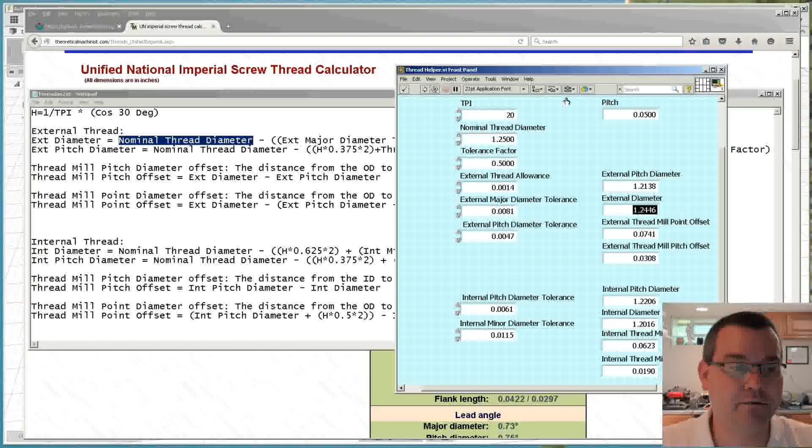Then I take the same tolerance factor concept and I add it to my minor diameter. So this will give me the internal diameter to make in my model. So if we go back to my calculator here, I've got a minor diameter tolerance of 11.5 thou. I'm going to apply half of that to my diameter, and I get 1.2016 inches.

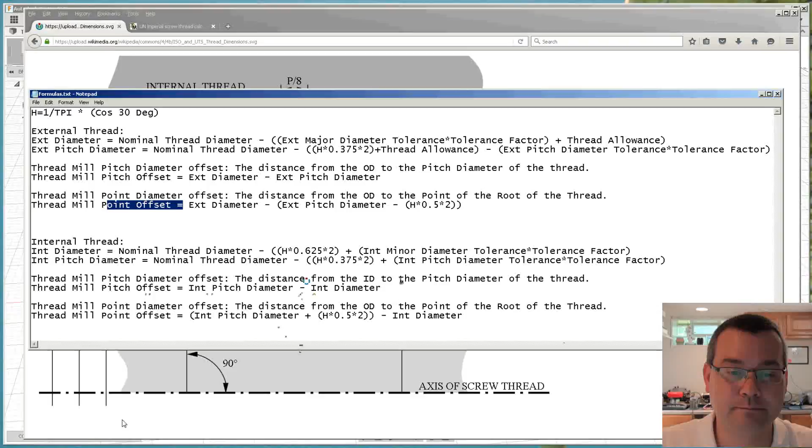So let's look at my little calculator here again. We typed in all of our tolerances from our thread calculator, and here's our pitch diameter tolerance. We're going to use half of it for this example, and then we're going to spit out those two numbers: if you're using the point method, this will be your diameter offset number, and if you're using the pitch diameter method, this will be your diameter offset number.

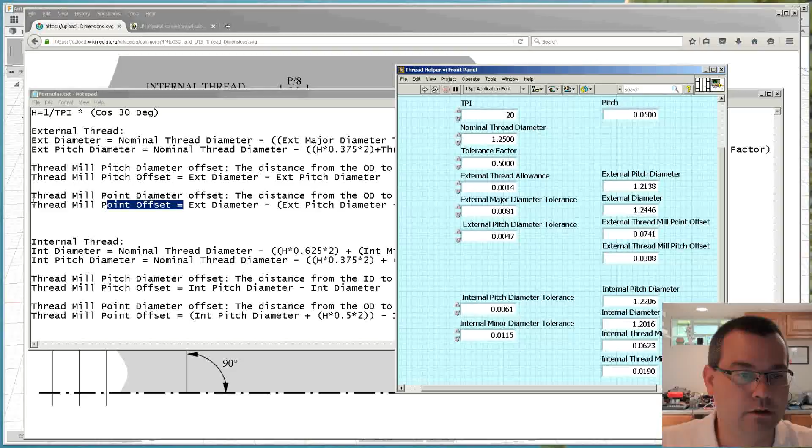So let's apply this and set up a toolpath in Fusion 360. First I need to define a mill, and for thread milling, Fusion 360 currently does not have a thread mill mill type, so they just have you use a flat mill, and we have to describe the diameter of the flat mill. Now I'm using the point diameter, so this thread mill is actually a little tiny bit smaller in diameter because thread mills have radius points on them, they don't have a very sharp point, there's a little bit of radius associated with them. But that is the diameter if it came to a sharp point. My flute length is simply just the height of the cutter, and that's about it. That's all you really need to specify for the tool.

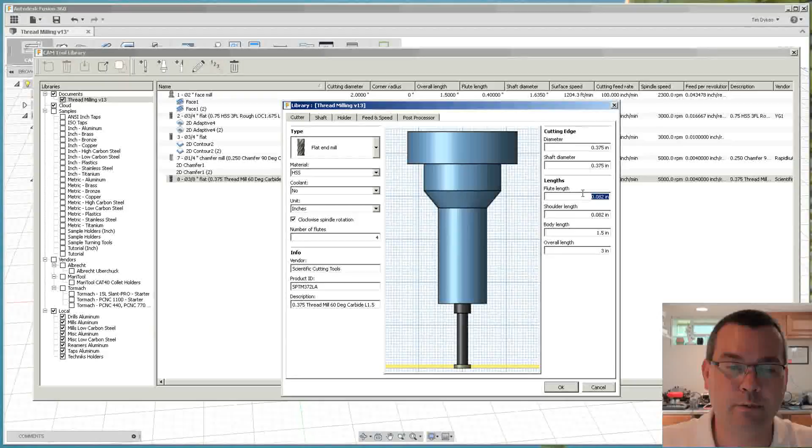So to make the thread mill toolpath, we select our setup, we go to 2D thread, select our tool, which is going to be the thread mill. Our feeds and speeds I already set up, those can come from the manufacturer. Now you just have to select the circular face you want to thread mill, so we'll select our external thread mill face.

Now the heights tab—because I'm going to machine this out of a piece of bar stock, what I'm going to do is keep the thread mill from hitting the bottom of the stock, so I'm going to offset it 50 thou up from the bottom. And then I like to give myself a little bit at the top too, so I normally give myself a little bit of lead-in so the thread mill has a better start.

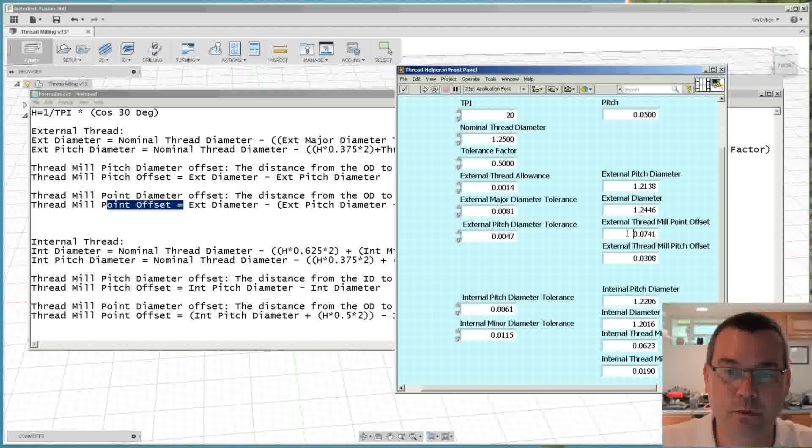Then we'll go to passes. Now this is where we've got to type these numbers in. So our thread pitch, again, that's just a reciprocal of your threads per inch—in this case, it's going to be 50 thousandths, which is 1/20. And then this is where the pitch diameter offset comes from. Remember, this pitch diameter offset is based on the diameter of the face that you selected, so that's why in our math here it's based on this external diameter. Going back to our calculator that performs this math for us, we're going to type in 0.0741.

So that's our pitch diameter offset.

Now, if you read the sheets from the manufacturers, typically they want you to do not multiple threads, they want you to do multiple passes, and you almost always want to do at least 2 passes. Now the depth of the pass is not going to be a 50% step—you don't want to do that. What you want to do is take a big chunk first, because on the first pass you're just going to have a small tip of the triangle cutting into the part, and on the second pass you have a much larger piece of the triangle cutting into the part as you feed it in deeper. So typically you want 65% of your depth on the first pass, 35% of your depth on the second pass, so that's about 12 thousandths of an inch step over that we're going to use. Now keep in mind that the step over is in radius and the pitch diameter is in diameter, so don't take half of this value—it's about a quarter of that value for your step over for the 35% roughly.

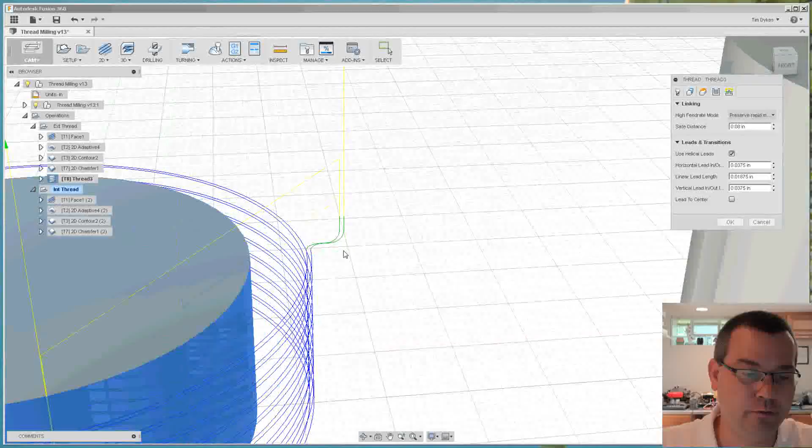Okay, now the other thing that I do is in the linking, I tell it to use helical leads. What that does is in your lead-in—let's make this lead-in a little bit bigger—I typically don't do a linear or vertical lead-in. If you have use helical leads checked, it's going to ramp this lead at the same pitch as the thread is at.

So if we uncheck this, see how this lead-in flattened out? And when we check it, see how it follows the pitch of the thread? We want to use that so that our lead-in on our thread is really nice. So we always want to select that.

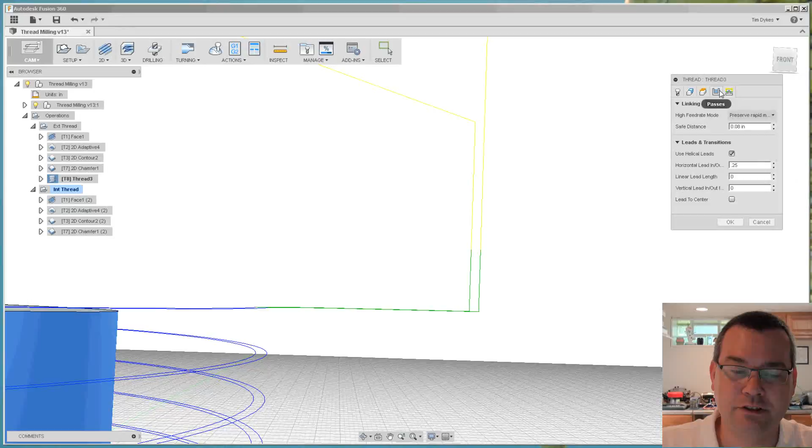So now that is how we configure our external thread. Our toolpath is all set for our external thread. Because we used our calculations and we know what our tolerances are and what our thread mill is, we'll be able to get an accurate, repeatable thread the first time. We don't have to guess at it anymore.

So let's talk about the internal thread. It's done almost identically to the external thread. If you're using the pitch diameter tool offset method, it's just the internal pitch diameter minus the internal diameter, and that gives you your offset. If you're using the point method, again it's almost identical, where we've got our internal pitch diameter plus half of h times 2, and then that gets subtracted by the internal diameter.

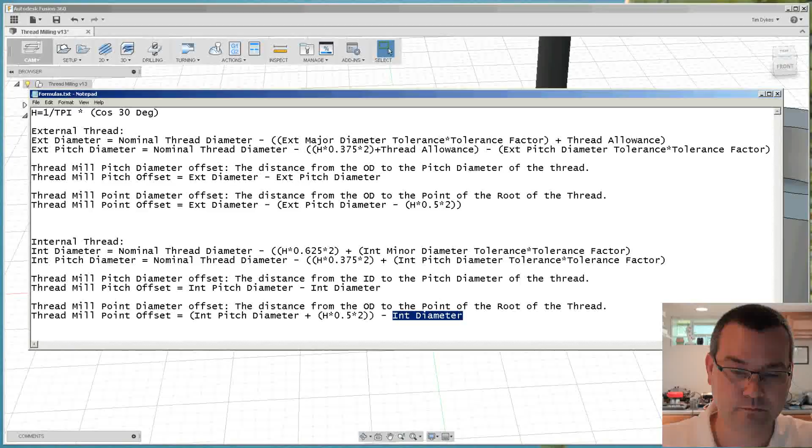So if we go back to our calculator, we've got our tolerance for our minor diameter and our pitch diameter, and we'll run this, and that gives us a point offset of 0.0623, or a pitch diameter offset of 0.019.

So because I'm using our pitch method, we'll cam this part next. We'll select our internal thread part, do thread, select our tool, select our face, go to our heights, and again we want to hold off a little bit from the bottom so we don't smash the tool into the bottom, and give ourselves a little bit above the part.

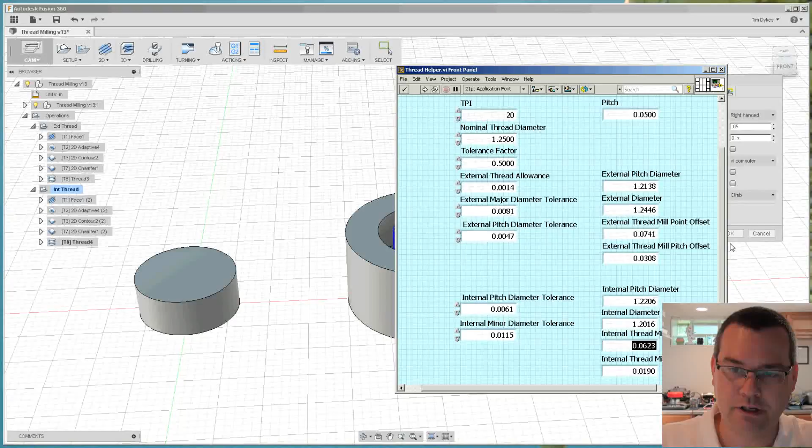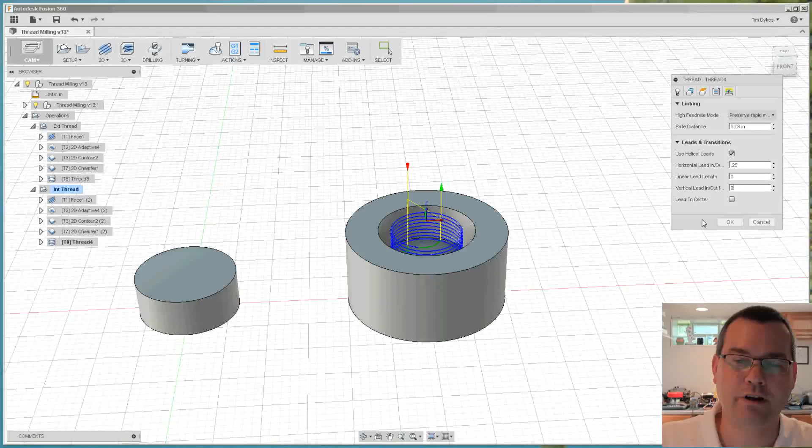Our thread pitch is going to be 0.05 because we're using the same pitch. We'll go back to our calculator and grab our pitch diameter offset, type that in. We want to do multiple passes—we'll do 12 thou again. We'll go to our linking, use our helical lead, and make a little bit bigger lead. And there's our thread milling toolpath for our internal thread.

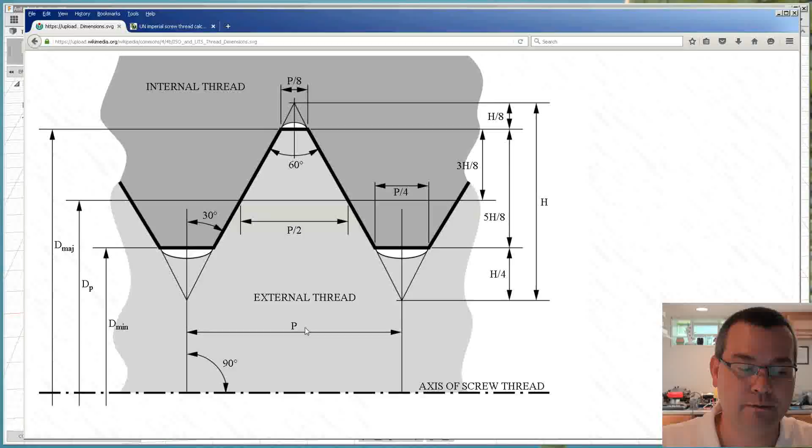So you can see, by having an understanding of the thread geometry and how it relates to these diameters, by understanding your tolerances and how they apply to these thread geometries, and then having these calculations to be able to calculate all of this, and understanding what the reference point is on your tool when using these calculations, we take the guesswork out of thread milling and can produce repeatable, accurate threads without having to make test parts.

So let's generate this code, send it to the post processor, send it out to the machine, and let's make some example parts.

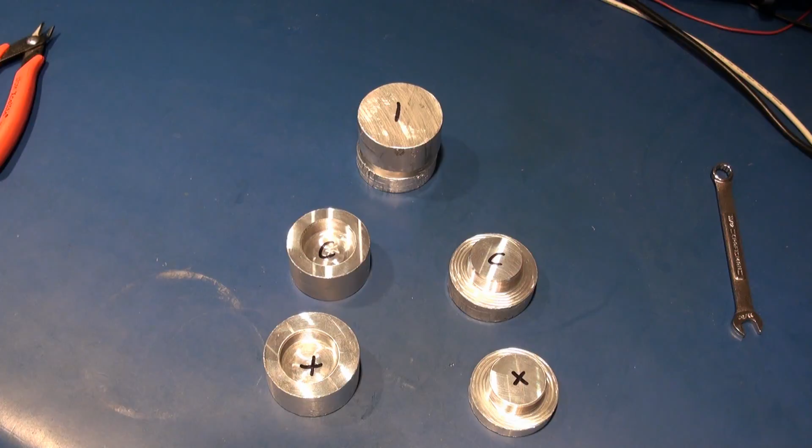Back from the machine, we have our parts made. I actually made 3 sets of these. The ones with C's are pretty much in the middle of the spec, and then I made a set at the very edge of the spec—this one is right at the very edge of the high spec—and then a set that's right at the very edge of the low spec.

Now with aluminum, you want to try to avoid using aluminum for both sides of your thread whenever possible, because aluminum galls real bad. So that thread ran beautifully, and there was almost zero play in it at all because the tolerancing was so tight and so good that after the second time I threaded it together and took it apart, it will never come apart again.

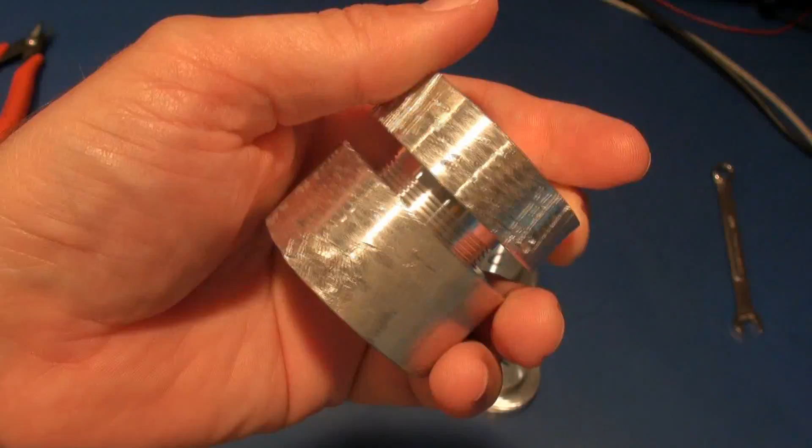So you can see by the testament of pipe wrench jaw marks on it, I've tried my darndest to get this apart, and this will never come apart. So with aluminum, you want to make sure you leave yourself a little more clearance in the threads, and always lubricate them as well, because it helps with the galling issue. Aluminum is always at risk of galling, so you have to be careful.

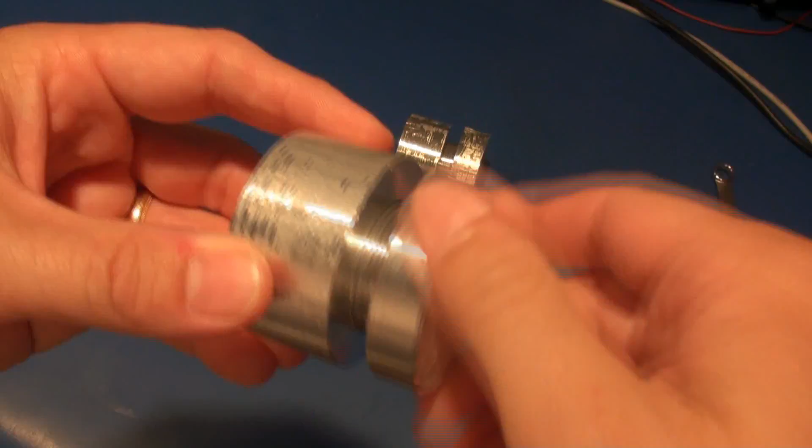So let's just compare these real quick. These two threads are at the top of their tolerance. You can see they screw together real easy, and there's a little bit of play there—not bad, but definitely a little play. That's at the very top of a class 2 thread tolerance. Now these ones have hit the thread tolerance in the center.

So you can see they thread together just as easy, but you can notice there's a lot less play in them. So in the tolerancing of a class 2 thread, you can see the difference. There's one that's in the center of the tolerance, and there's one that's at the plus edge of the tolerance. Then this one, hey, there's no play in this one. It's seized up real bad, but this one had virtually no play at all at the very bottom end of the tolerance. So you can see it's in the middle, and that's as loose as it will get. There's quite a bit of tolerance they give you, but in reality, it's not much - only about 5 thou total.

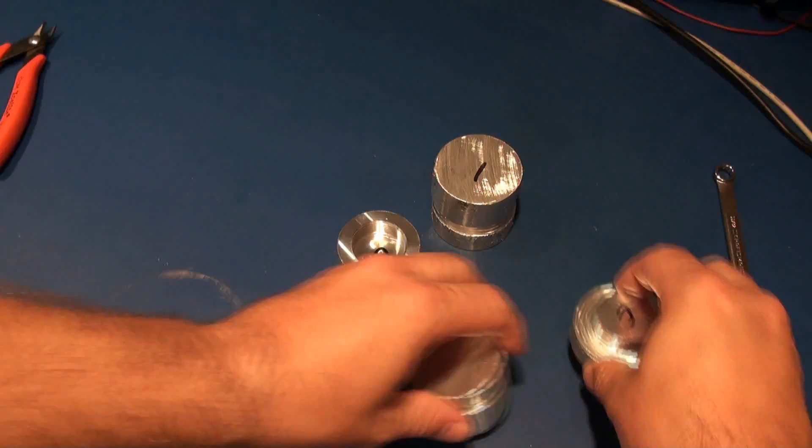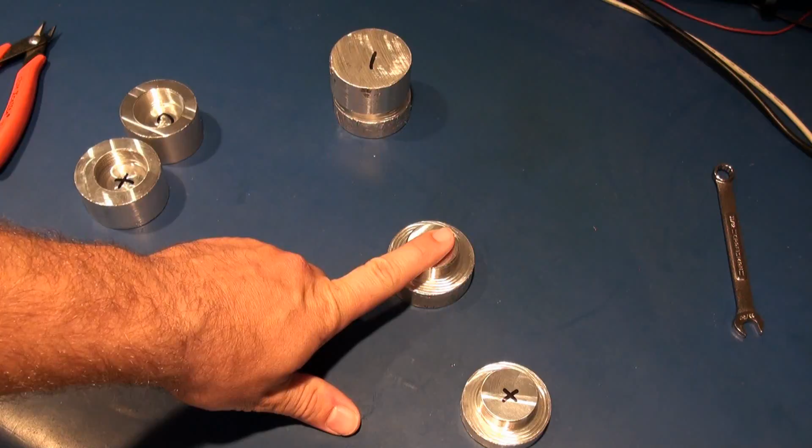So the next question you get a lot is, how do you verify your threads? If you had to make this part for a customer and you did not have the mating part to it, how can you verify this thread so that when you ship it to your customer, you'll know that it will mate to their part? A lot of people will say, oh, well, optical comparator or some expensive go, no-go gauges. But for an external thread, there's a very easy, cheap way to measure this thread very accurately.

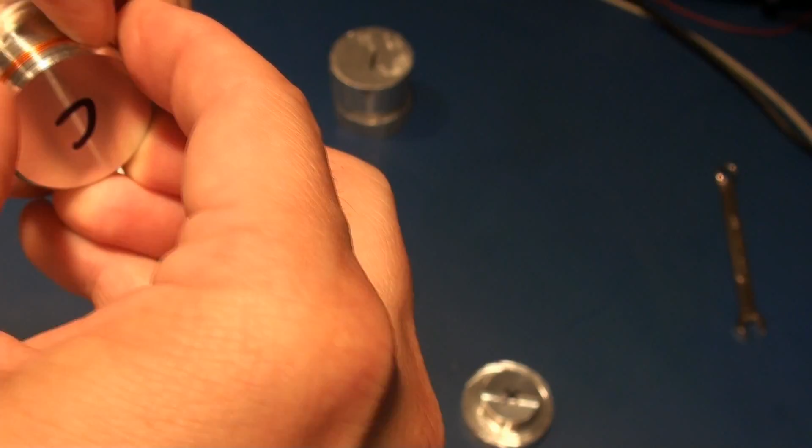It's called overwires. So here's a piece of wire. The concept is pretty simple. You have a triangle here, you have a circle here. If we use some basic geometry, we can make the thread pitch diameter, which is the diameter we want to measure, larger than the major diameter by using the circle, and then we can measure that. So let's wrap our wire around it. I'll try to do this on camera. This is where the evolution of the third hand is a bit slow and lacking. So I just wrap this around. Okay, we got it nice and in our threads.

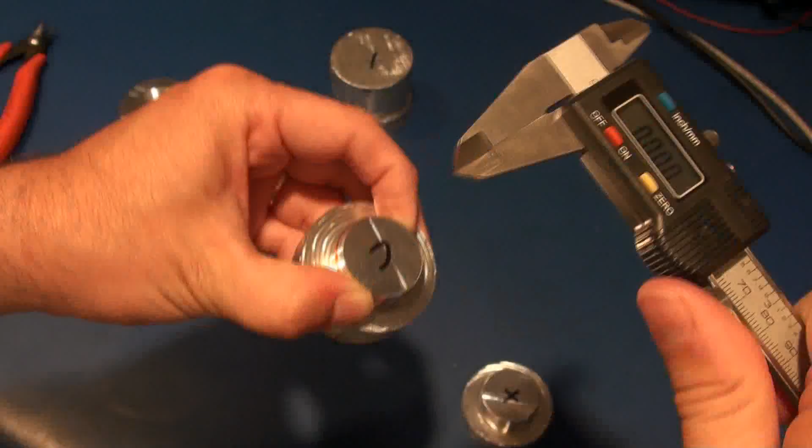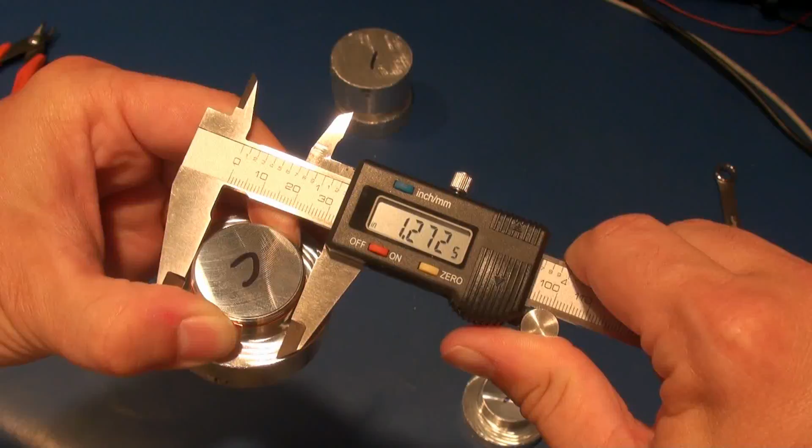Now if you notice, the wire is sticking out a little bit larger than the major diameter. So now we can take our nice high quality Harbor Freight calipers - I'm just using the stuff that most people have in their shop - and then we can measure it, and we get 1.2725. Okay, now what do you compare that with?

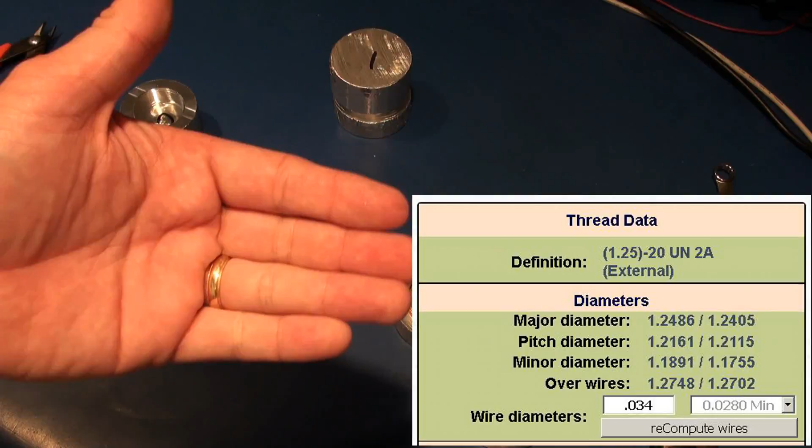Remember our Practical Machinist website that I like so much? The reason why I like it so much is that it has this nice little over wire section. This wire is 34 thousandths diameter, so I typed in .034 and I hit compute wires. Then you can see that a thread pitch diameter over wires of 1.2725 is pretty much directly in the center of our spec. So we hit this one almost dead on.

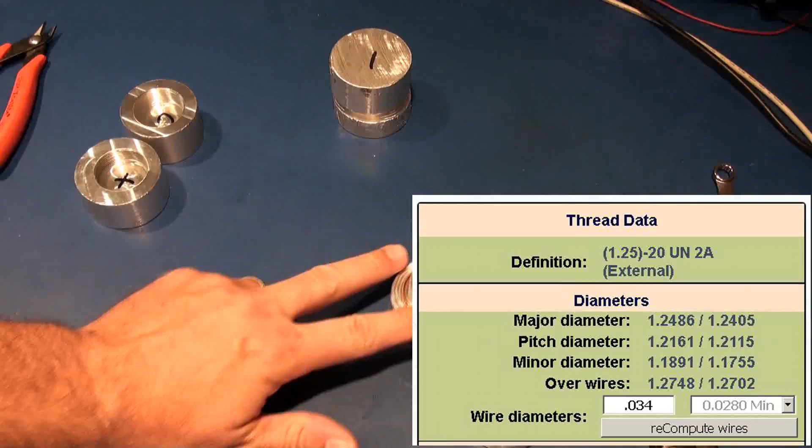So that was a good part. So you can see, you can easily tell the external thread pitch by using over wires. We can easily measure the external major thread diameter - that's just this measurement here. We went for 1.2446, I believe, so we're right on that. And we can easily measure the minor inside here - I'm catching the inside lip here. I think we're at 1.2016. So there you go, we nailed that.

Now the pitch diameter of an ID thread, if it's a really large thread, you could still use the over wires concept. The website doesn't support doing an internal thread that way, and it's really tricky to try to do that way. But what you can do, because we can accurately measure external threads, you can simply machine an external thread at the minus, an external thread at the plus, and now you've made yourself a set of go-no-go gauges. So now you can check an internal thread. So there's our practice parts and our camming.

So let's wrap it up. I hope you enjoyed this video on thread milling. I know it's a pretty advanced topic and it gets a little muddy in the math. So if you stuck with me through the whole video, thank you and I appreciate it. I'm just trying to do a deeper dive in these videos and really show you the working math and knowledge behind these types of operations that are done on CNC machines. There's a lot of videos out there that'll show you how to make a thread, but then when you try to go do it yourself, you find that a lot of the steps are missing. So that is complete from A to Z on how to perform thread milling.